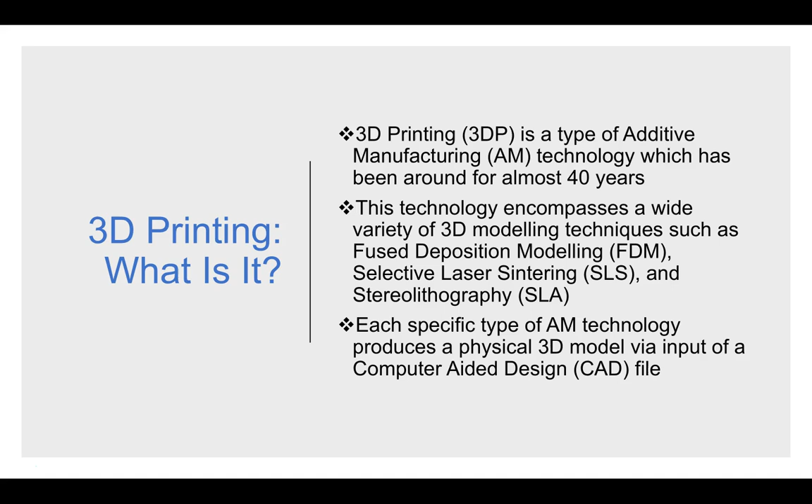3D printing is almost a 40-year-old field, implemented first by Dr. Kodama in Japan in 1980. He implemented a system which used UV laser beams which solidified layered liquid photopolymer resin instantly. This process was long and inefficient, and Charles Hull then produced a more efficient stereolithography system which worked similarly in 1986.

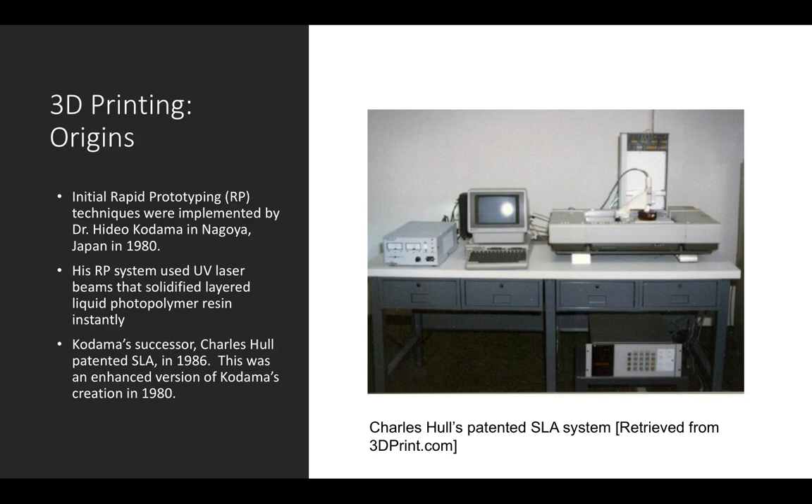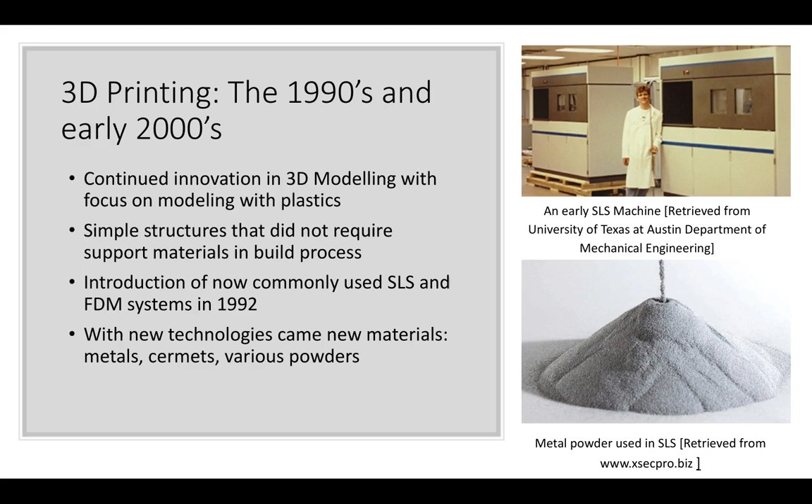Throughout the 90s and into the early 2000s, continuous innovation occurred in the field. A focus was kept on modeling simple designs with plastic materials. We then saw the inception of basic selective laser sintering and fused deposition modeling systems in 1992. In turn, new materials appeared which consisted of powders of metals and cermets, as pictured in the right figure.

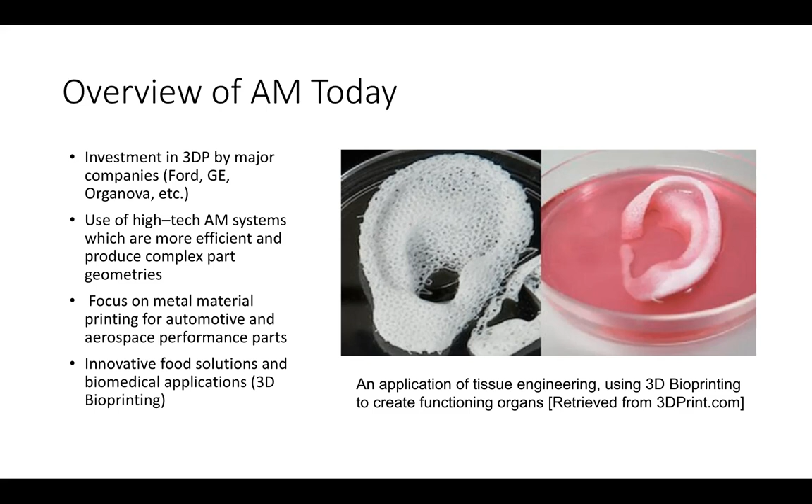Today, major companies invest in 3D printing and additive manufacturing. More high-tech additive manufacturing systems are now able to produce increasingly complex geometry parts. A focus is now put on metal material printing in the automotive and aerospace fields for high-performance parts. Also, innovative solutions in the biomedical and food industries are seen today. Applications can be seen in the accompanying figure. This is a use of 3D bioprinting.

Now we look at specific advances in the automotive and aerospace field. These industries are where most advanced additive manufacturing technologies are used. New systems such as electron beam melting and selective laser melting are used to process high-performance, cheap, and lightweight parts. Systems have become automated, which require limited scaffolding and building and allow intricate design. With these new technologies comes the use of new materials, such as tool steels, stainless steels, titanium, carbon fiber, and more.

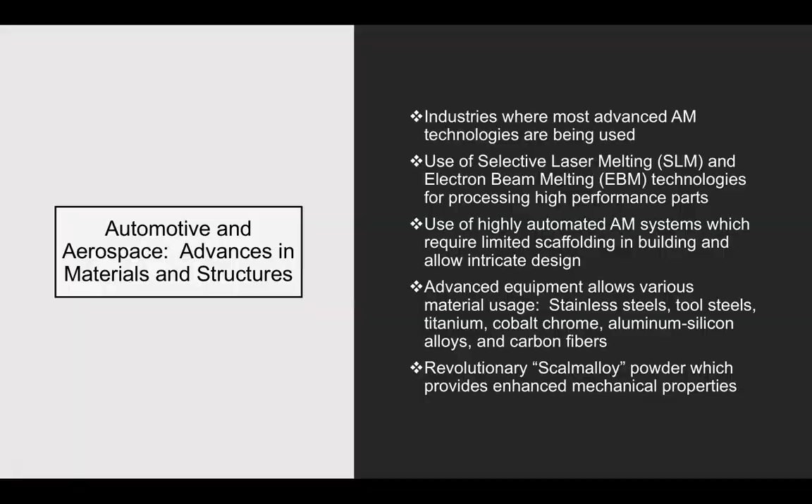From our research, we were able to come up with predictions for the future direction of 3D printing in the field. First, further materials will be developed. An increase in materials that are heat resistant, can endure intense loading, and produce more flexibility will be sought after. Secondly, an increase in metal printing will occur. As of now, plastics are currently less expensive and more readily available. With an increase in metal printing, companies will have more options when it comes to manufacturing specialty high-tech parts.

Lastly, advancements in 3D printing technologies for component assembly will occur. Instead of fabricating individual parts to be assembled, it is likely additive manufacturing technologies in the near future will be able to print and assemble parts all in one step, without the need for traditional joining processes like welding.

Then we were able to predict the impacts on the industries. First, 3D printing allows companies to use minimal material to process parts. This means saving costs associated with wasted material and resources. Secondly, assembly line production will change since production teams will be given greater flexibility, since 3D printing can become a single operation with

negligible setup time. Lastly, additive manufacturing can be done at lower costs and products fabricated can be sent to clients more quickly. This limits the necessity to form strategic pricing. This will allow companies to be competitive with pricing, and they will be able to price products as they see fit to ensure constant business.

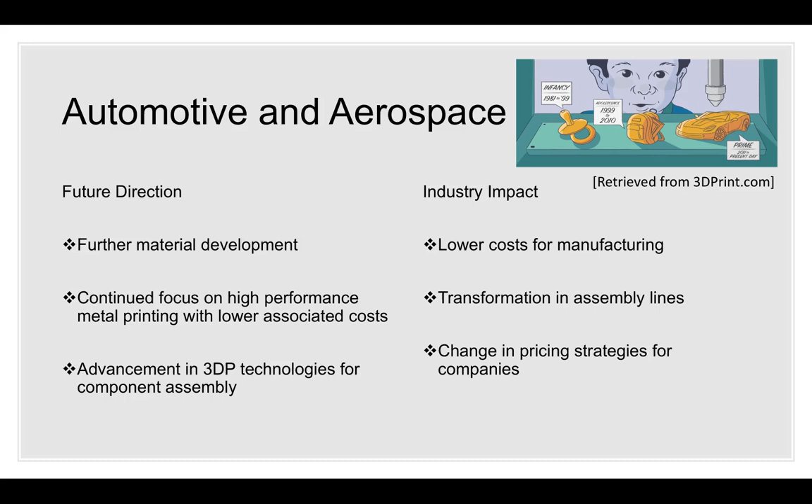3D printing can automate food preparation, improve the process efficiency, and the resultant food quality. Foods which are 3D printed enable the manufacturer to have more control over nutritional quality. A range of 3D printing methods have been utilized for complex food structures, such as selective laser sintering, hot air sintering, hot melt extrusion, binder jetting, and inkjet printing.

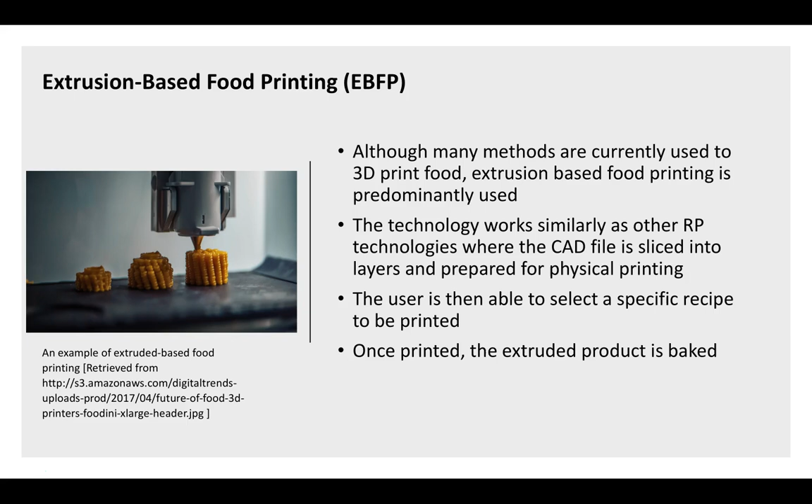Among them, extrusion-based 3D food printing is the most widely adopted method. The printing technology works similarly to other rapid prototyping technologies, where the CAD file is sliced into layers and prepared for physical printing. It may seem strange to print food, but some of the materials used are amplifying the possibility to create unique and complex structures. Some materials are very basic.

For example, in extrusion-based food printing, the materials are cooking materials, such as liquids like oils, soluble solids, and powder materials such as flour. In the latest research, a fish surimi gel is being tested for complex food structures. This material includes low viscosity parameters that allow for simplistic extrusion. Addition of salt to the solution increases water retention, strength, and hardness after extrusion.

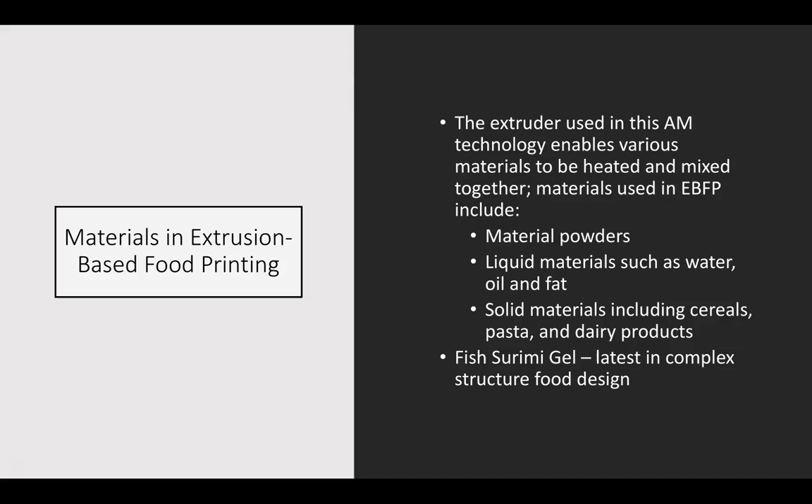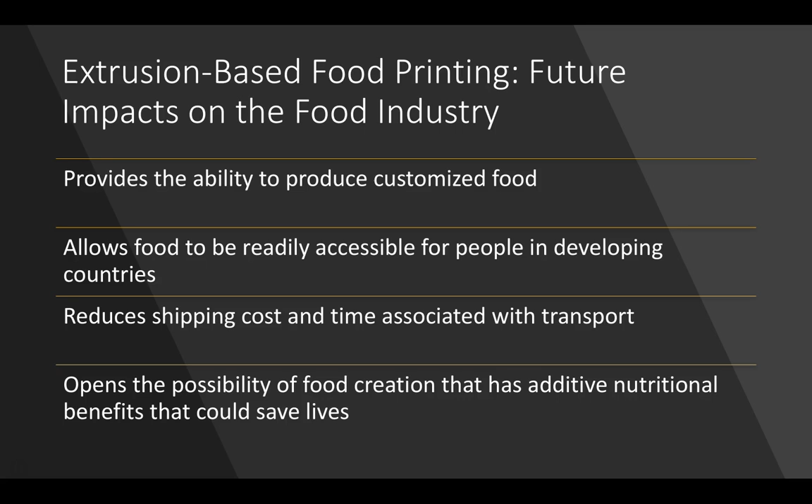In the future, research can be developed to imprint large quantities of nutrients into small, printed, edible material. This application can be used to save those in developing countries who suffer from malnutrition. Other aspects that can lead to future research is creating home accessibility that can reduce transportation costs of overseas product. This aspect can save costs for national economy purposes and reduce intake of potential wasted and rotted foods.

Now I will be talking about the biomedical applications of 3D printing. In the year 2000, a new rapid prototyping technology, referred to as 3D bioplotting, was developed to create soft tissue scaffolds. These soft tissue scaffolds act as templates for tissue regeneration and guide the growth of new tissues. The advancements of 3D bioplotting have aided in significant advancements in the tissue engineering industry, which aims to restore tissues that have been damaged by combining cells from the body with porous scaffold materials.

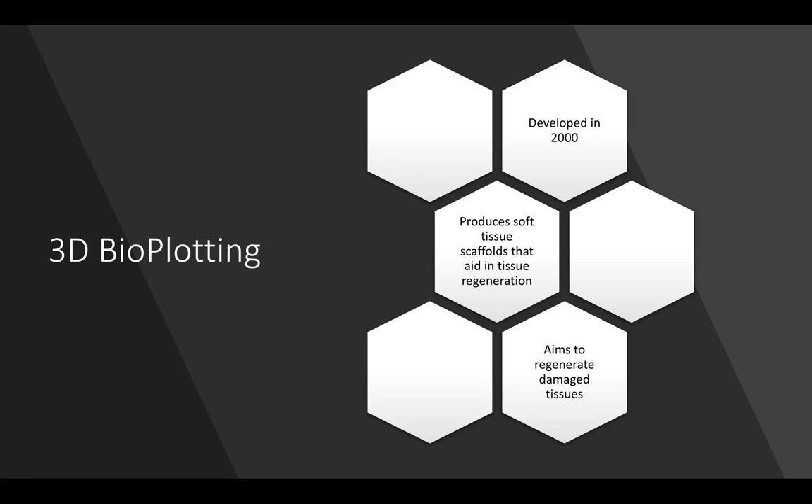Bioplotting technology involves a CNC milling machine, CAD, and a 3D plotter used in combination to achieve the patient-specific tissue engineering application. A liquid is dispensed from a syringe using air pressure while moving the syringe in all 3 dimensions. High-quality parts can be fabricated with user-defined porosity and interconnecting channels that allow flow of nutrient media. High-precision motors with 0.001 mm movement accuracy allow complex and reproducible inner patterns to be created.

A specific example of an experiment that yielded much success in creating scaffolds for tissue engineering applications used an agar and gelatin solution. The agar and gelatin powder were dissolved in hot water, placed between 2 heated plates, and covered with silicone oil to prevent the polymer solution from drying. This solution was then cast into a mold using a bioplotter and cooled down. This process caused the solution to solidify very quickly, producing high-quality and complex hydrogel scaffolds.

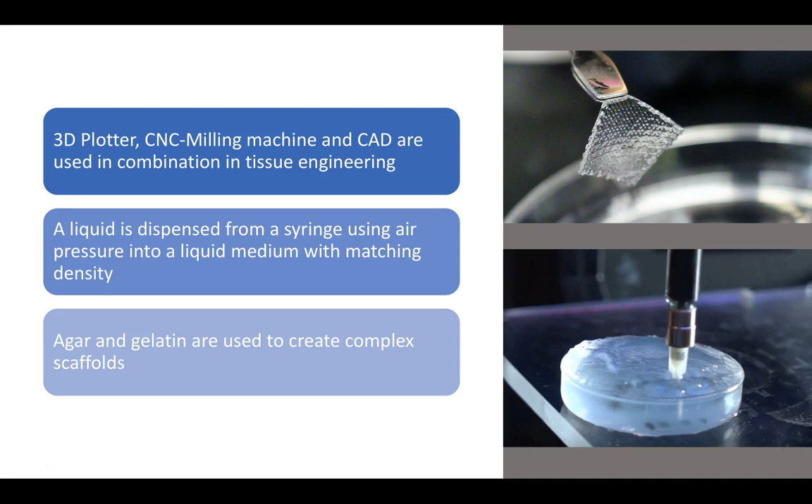3D bioplotting is currently being used in a variety of industries, with the most prominent and arguably the most promising industry being soft tissue engineering. This RP technology has allowed medical professionals to conduct groundbreaking research and manufacturing over a wide range of areas, including skin, cartilage, bone, blood vessels, organs, and drug and nutrition delivery.

3D bioplotting has also been used to fabricate ovary implants. Scientists from Northwestern University created 3D bioplotted ovary implants and tested them on mice who had their ovaries removed. This procedure found that mice were able to ovulate, give birth, and even nurse their healthy young. Scientists also found that the prosthetic ovaries restored the natural hormone cycles of the mice.

The researchers reported that the implementation of more than 2 scaffolds resulted in an 82.8% survival rate. The 3D bioplotted procedure also verified that these scaffolds are able to support the growth of blood vessels in mice without the need for additional substances to stimulate the blood flow process.

Researchers from the Netherlands believe that 3D bioplotting may offer comfort to diabetes patients, taking them a step closer to being able to help patients who experience severe hypoglycemia. Their research showed that once the islet cells were retrieved from the 3D scaffolds in the lab, they were able to produce insulin and respond to glucose in the same way as a non-printed islet cell. The researchers also found that islet cells would not migrate around the body after they have been transplanted into the donor site. It is predicted that scaffolds will be able to be transplanted into patients with type 1 diabetes to help regulate their blood sugar levels.

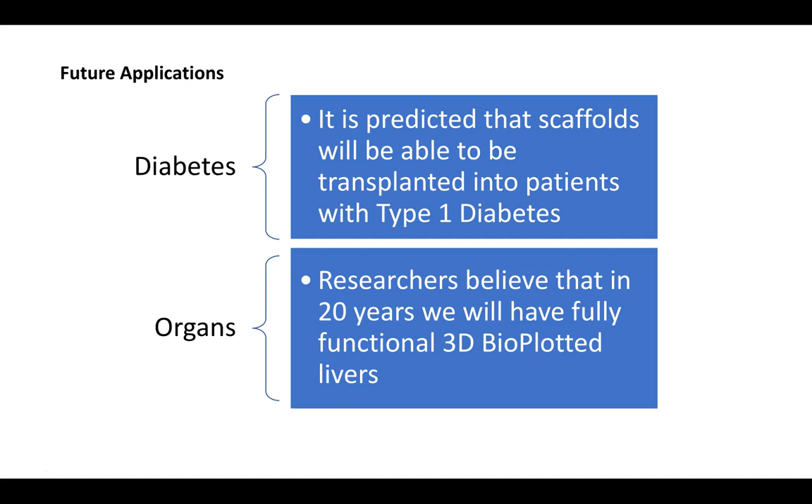Bioplotting is also predicted to aid in the production of 3D printed organs. Carlos Carvalho, part of the Process and Material Development Department of a popular bioplotting company, says that the most promising research is being done in printing livers. The liver is the only organ in the human body that can regenerate itself, but at the same time, the only option for patients with irreversible liver failure is a transplant from a living donor. Researchers believe that in 20 years' time, we will have a fully functional 3D bioplotted liver.

After discussing these 3 aspects of 3D printing, it is important to note that these applications are some of the many that are advancing today's society. Through future research and advancing technology, the world as we know it will adapt to great heights.